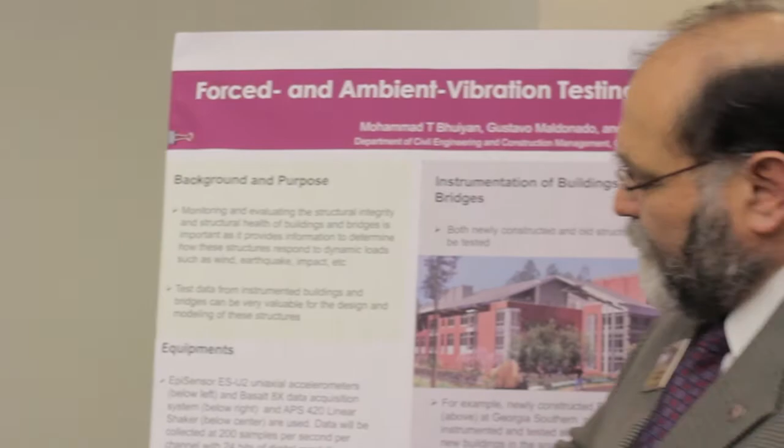All right, thank you, Dr. Navaee, for the introduction. And I would like to mention a few words related to the procedure that we plan to apply in this research. And basically, what we have here in this poster are instruments that we are going to use. The one over there is a sensor, a high-sensitivity acceleration sensor, and we have the data acquisition system.

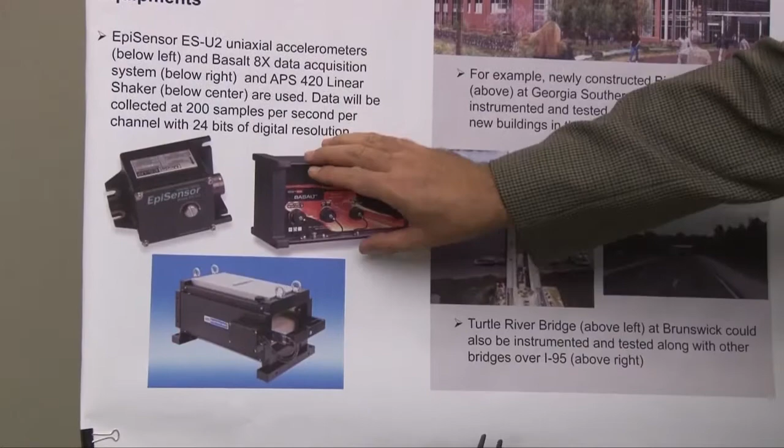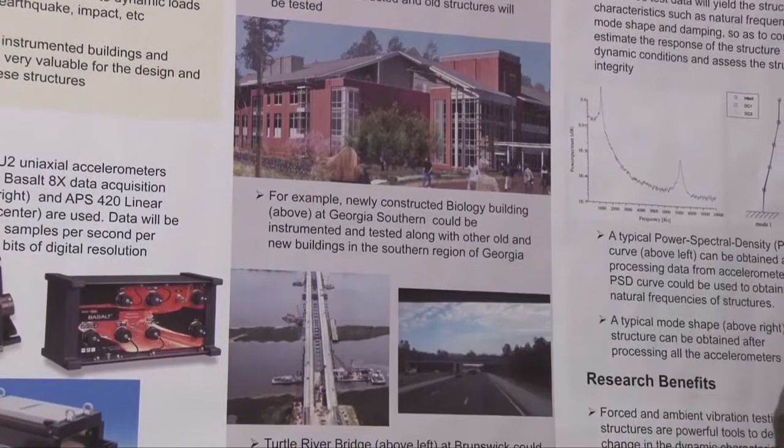What we plan to do is basically attach these sensors to buildings and also roadway bridges, like the examples that we have here. And the main idea is to try to obtain data with which we'll be able to predict if the building has had some damage or some deterioration. So the main idea is the following. We are going to shake the building or the structure, say a bridge, and then with the sensor we collect the data, acceleration data, and then we post-process that data to obtain a spectral result.

The spectral results are very important because they tell us the maximum amplitude of the structure at different frequencies. And every structure has natural frequencies that are directly associated to the stiffness of the structure. So if we measure that in 2 different time periods, let's say 1 year apart, and a bridge is deteriorating, we make the measurement today, and then we make the measurement later,

we can see with this instrument the different natural frequency of the structure, and we can see also the relationship between the frequency and the stiffness. If we see a change in the stiffness of the structure, then we can associate damage directly to that structure. So that is the main idea, to obtain identification of deterioration of the structures, in a few words.

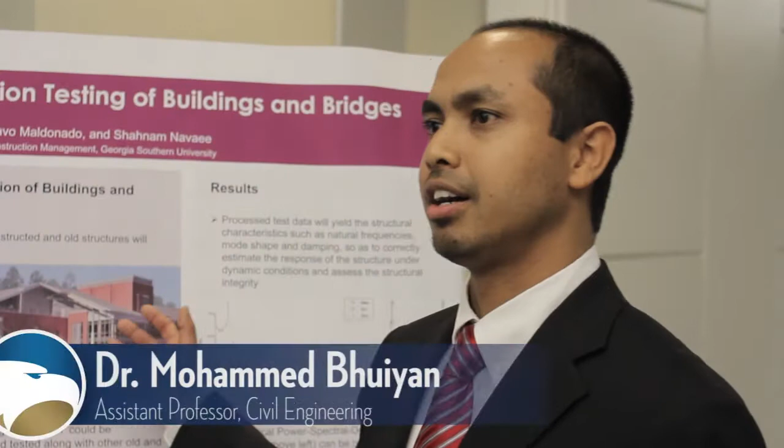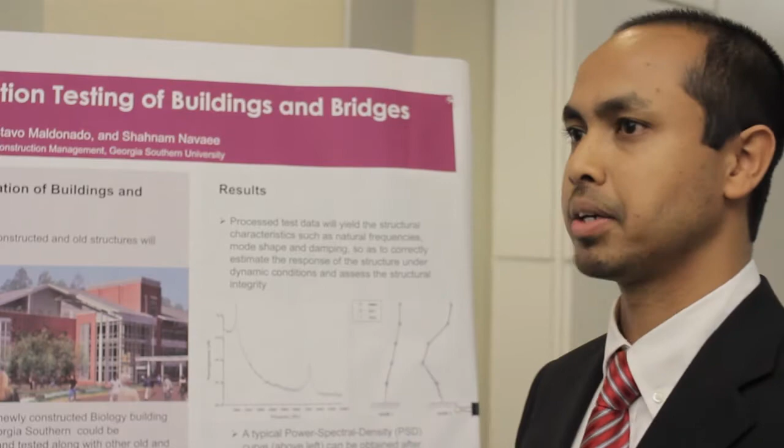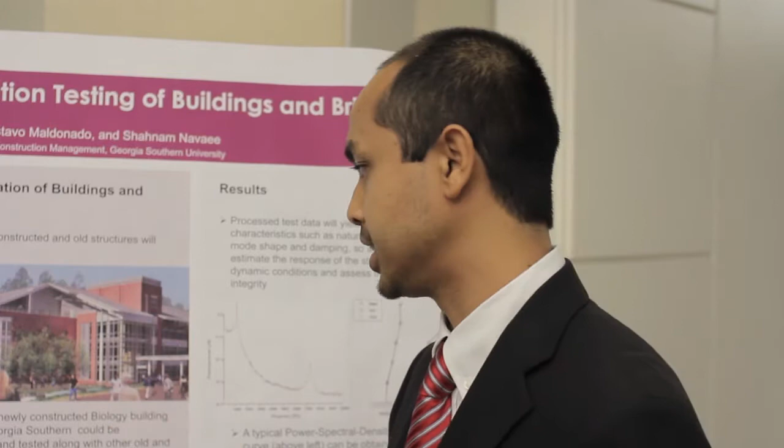We are going to use industry standard and research standard software such as SAP 2000 and OpenSees to model the structure, like buildings, bridges, water tanks, whatever it is. And once we get the results from our testing, we are going to update our numerical model. Once we update the model, that means we have a realistic model of the building or bridge. With that realistic model, we can evaluate whether the building or bridge can sustain hurricane or earthquake or impact loads. That is one benefit of the research.

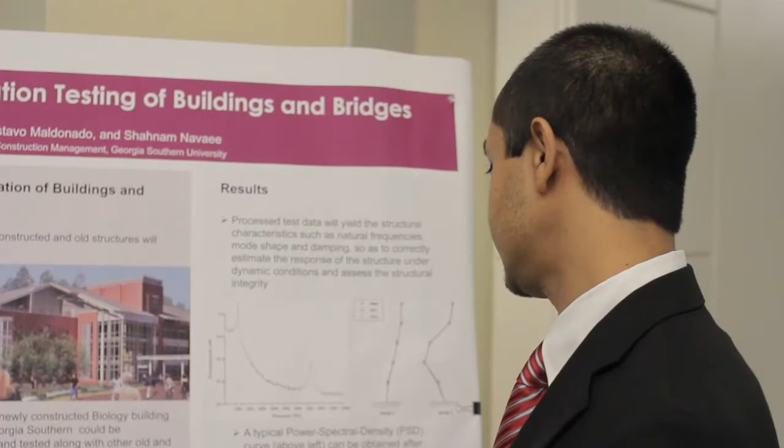Now another benefit would be that DOT is very interested in the condition of their bridges, as they have thousands of bridges around the state. And now with the help of the instrument, we may be able to evaluate the state of the bridge, whether it needs retrofit or not. So in summary, those instruments will be a great help to evaluate structural health.